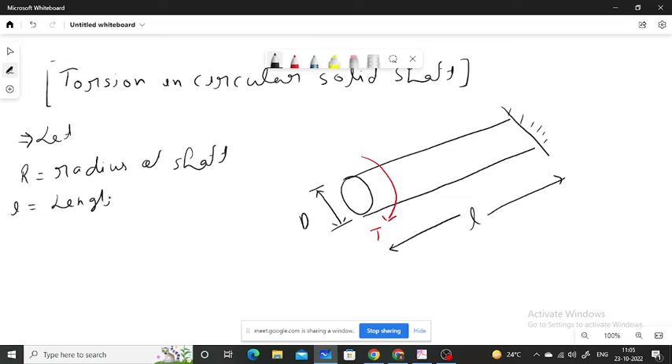Capital R is the radius of the shaft, L is the length of the shaft, capital T is the torque applied, small tau is the shear stress, capital G is the modulus of rigidity.

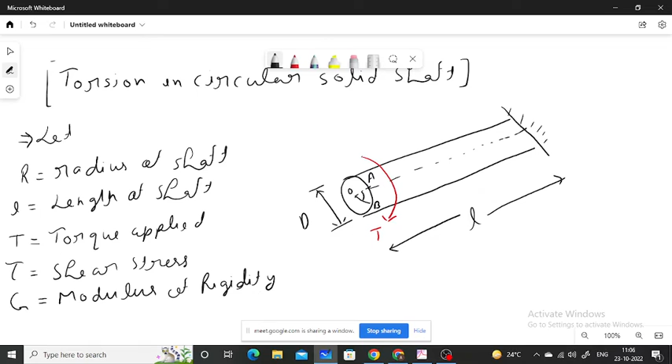Angle AOB is theta. This angle is known as angle of twist. Theta is angle of twist.

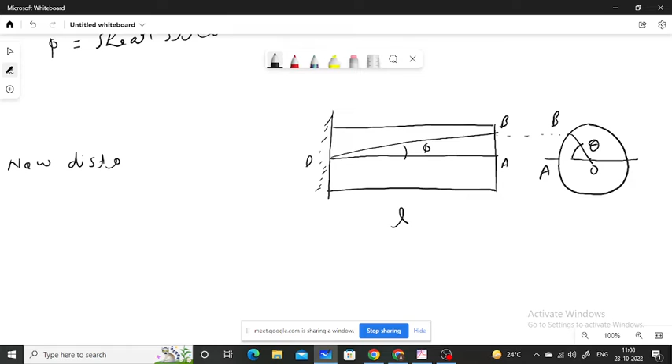Now, distortion at the outer surface due to length, due to torque T.

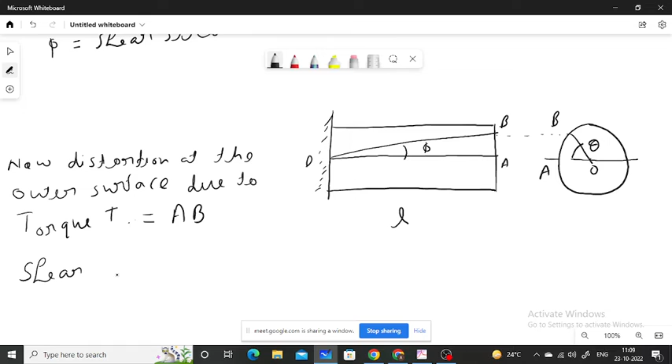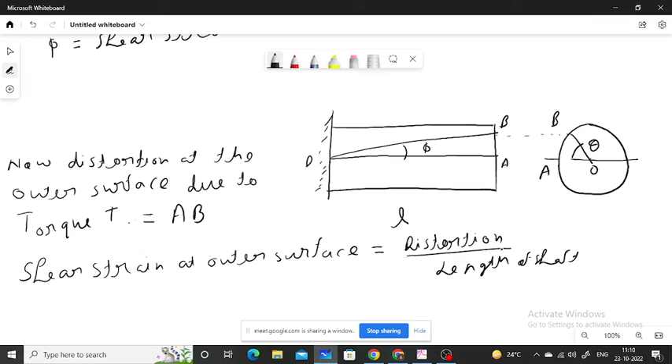Shear strain at the outer surface will be equal to the distortion divided by length of the shaft. As we know that

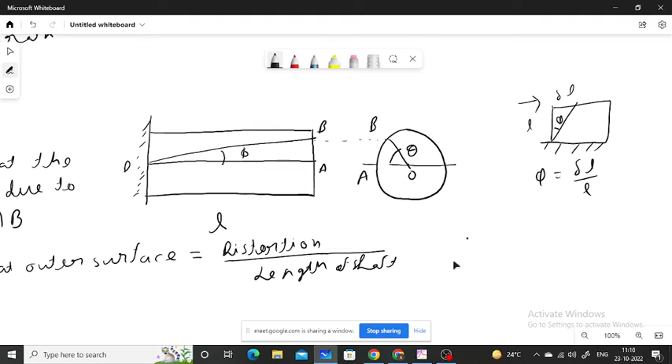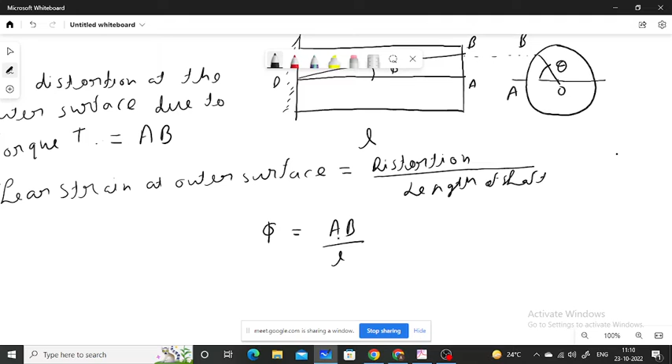in the case of shear strain, if a parallel force is applied and it shifts by delta L, this is the initial length L, then in that case shear strain phi is equal to delta L upon L, distortion upon initial length. So here shear strain phi will be equal to AB upon L.

Now, distortion AB will be equal to the radius of the arc multiplied by angle, r theta. Substituting the value of AB in above equation, phi will be equal to r theta upon L. Okay, r theta upon L.

We know that, according to Hooke's law, shear stress is equal to the modulus of rigidity into strain. So from here, phi will be equal to the shear stress upon modulus of rigidity.

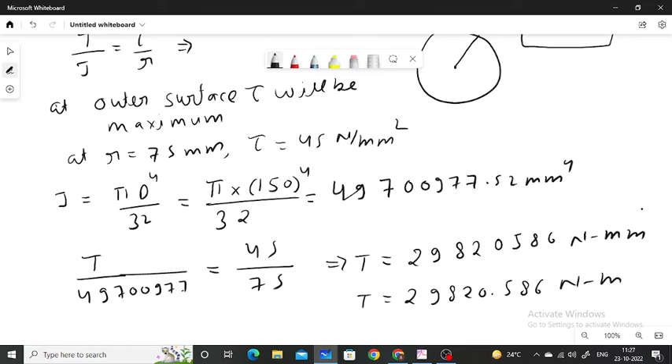Now putting this value in the torsion equation, T/49,700,977 = 45/75, the shear stress is 45 and the radius is 75. So the maximum torque T will be equal to 29,820,586 N·mm, or 29,820.586 N·m. This will be the maximum torque that can be transmitted by the shaft. Okay.

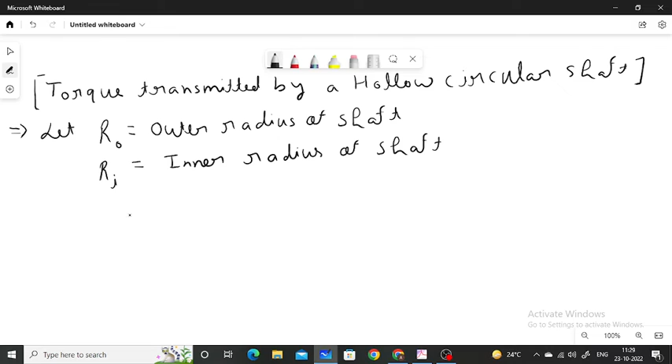Now come to the hollow circular shaft: torque transmitted by a hollow circular shaft. Let Ro be the outer radius of the shaft, Ri the inner radius of the shaft, capital T the torque transmitted by the shaft, and G the modulus of rigidity of the shaft.

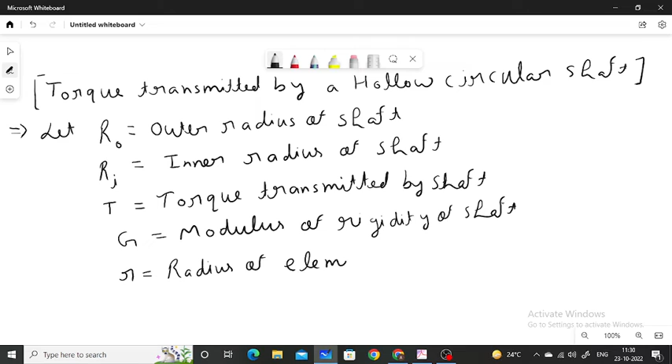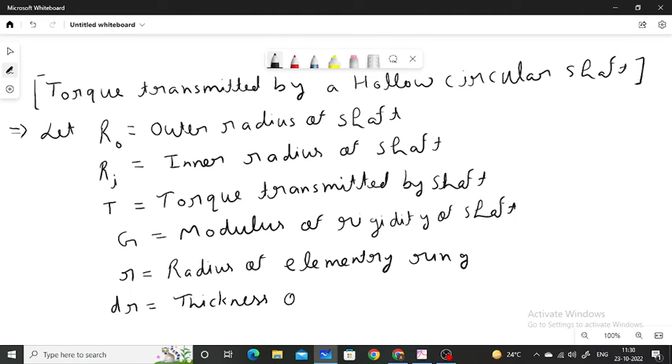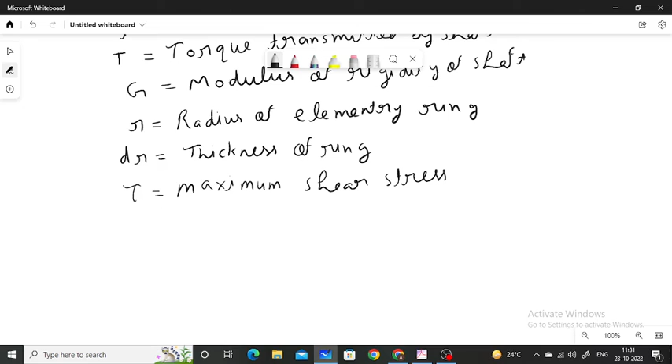Okay. And small r is the radius of the elementary ring, dr is the thickness of the ring, and tau is the maximum shear stress. This maximum shear stress occurs at the outer surface of the shaft. Okay, and tau r is the shear stress induced on the elementary ring. Okay.

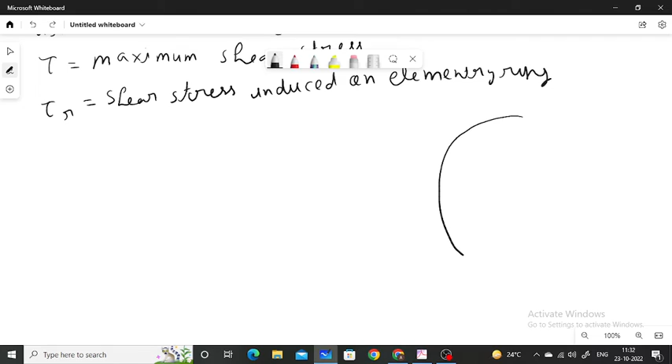The outer radius of the shaft is Ro, the inner radius of the shaft is Ri. Small r is the radius of the elementary ring and dr is the thickness of the elementary ring. Now, shear stress at the elementary ring is obtained from the equation tau/Ro = tau r/r, or shear stress at the ring = (tau/Ro) × r.

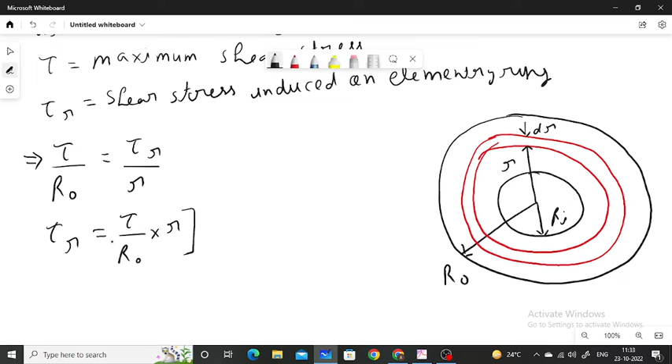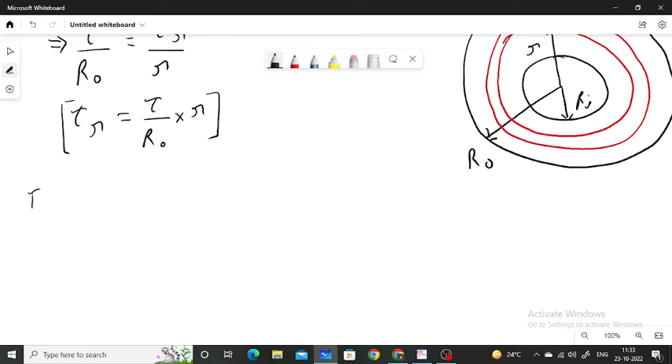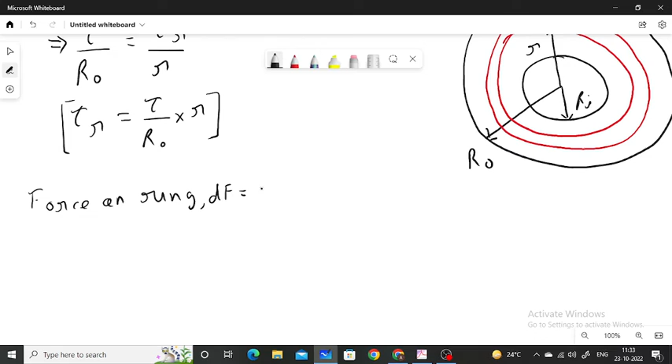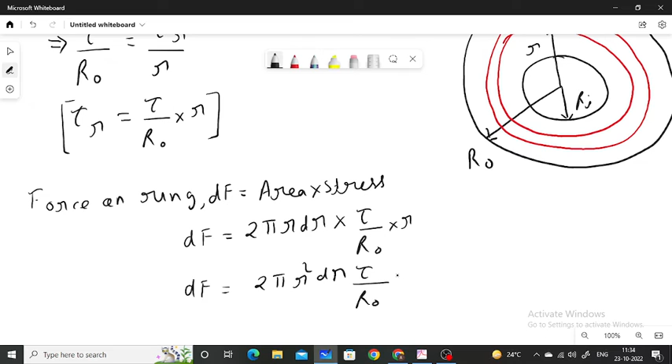Turning force on the ring: force on ring dF = area × stress. Area = 2 pi r dr, and the stress = (tau/Ro) × r. Now dF = 2 pi r² dr tau/Ro. Okay, this is the force on the elementary ring.

Now the turning moment on the ring, dT = force × radius r. So dT = 2 pi r³ dr tau/Ro. Okay, the total turning moment on the shaft will be equal to the integration of dT from Ri to Ro. Okay.

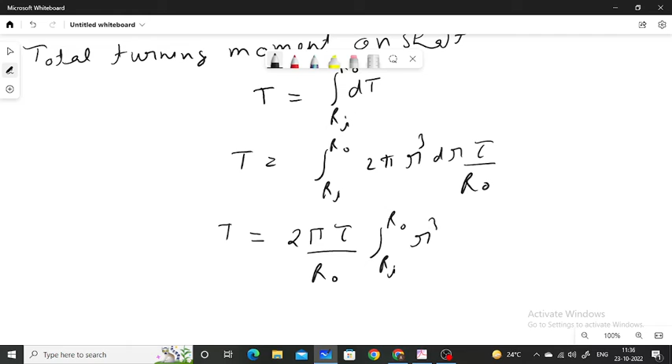Now integrate the above equation: integration from Ri to Ro of 2 pi r³ dr tau/Ro. So from here T = (2 pi tau/Ro) × integration from Ri to Ro of r³ dr. T = (2 pi tau/Ro) [r^4/4] from Ri to Ro, or T = (2 pi tau/Ro) × (Ro^4 − Ri^4)/4.

Let Do be the outer diameter of the shaft, and Di the inner diameter of the shaft.

It is equal to 2 Ro, and this is 2 Ri. Okay, now from here, outer radius will be equal to the outer diameter of the shaft divided by 2. Ri will be equal to the inner diameter of the shaft divided by 2.

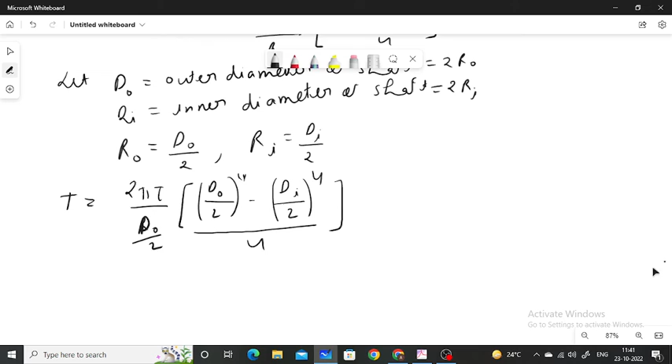Now T will be equal to pi by 2 shear stress tau, within bracket d outer to the power 4 minus d inner to the power 4 upon 16, into 2 upon d outer, the diameter of the outer surface. Okay.

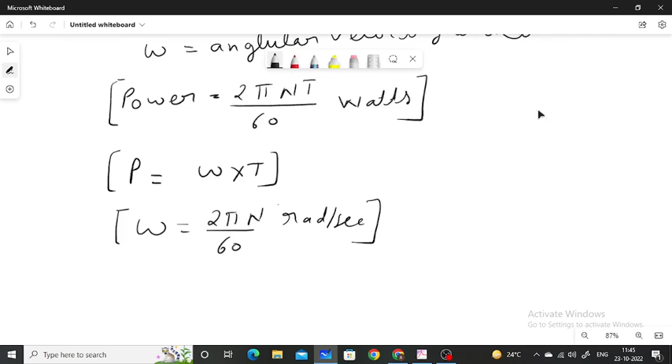So for a solid or hollow circular shaft, the torsion equation will be T by J is equal to tau by R is equal to G theta by L, where T is the maximum torque transmitted by the shaft and J is the polar moment of inertia. For a solid circular shaft, J is pi d to the power 4 by 32, and for a hollow circular shaft it is pi by 32 times outer diameter to the power 4 minus inner diameter to the power 4.

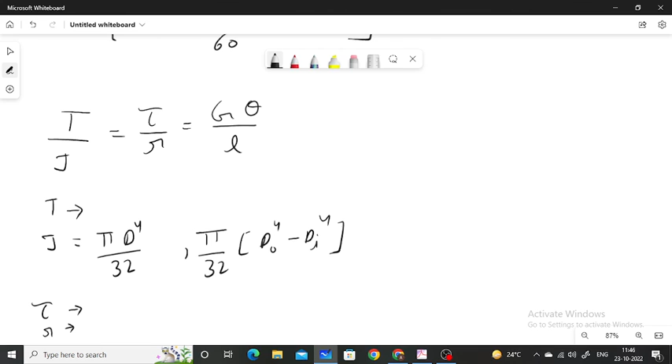Tau is the stress induced at a ring of radius r. Capital G is the modulus of rigidity of the shaft. Theta is the angle of twist and L is the length of the shaft. Okay. By this formula we can calculate the shear stress on different rings due to the torque applied on the shaft. Okay.

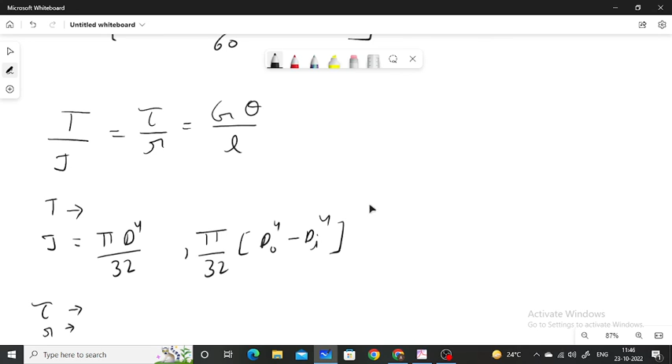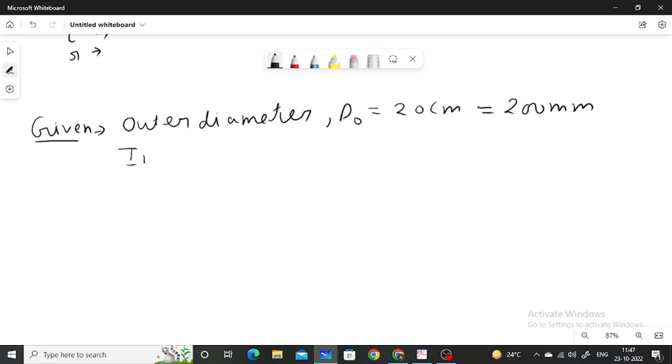Now, a hollow circular shaft has outer and inner diameters of 20 centimeter and 10 centimeter. Outer diameter DO is equal to 20 centimeter or 200 mm. Inner diameter DI is equal to 10 centimeter or 100 mm.

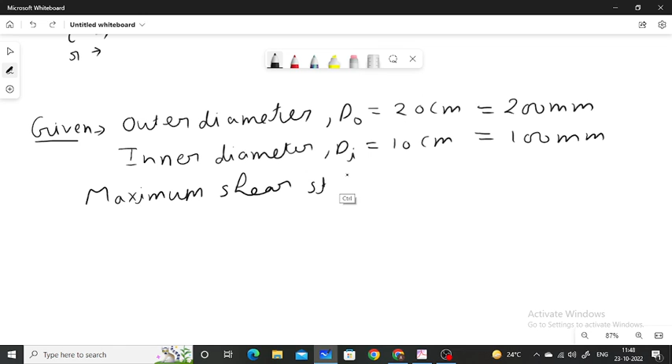In a hollow circular shaft of outer and inner diameter of 20 centimeter and 10 centimeter respectively, the shear stress is not to exceed 40 Newton per mm square. The maximum shear stress given is 40 Newton per mm square. Find the maximum torque which the shaft can safely transmit. Let capital T be the torque transmitted by the shaft. Is it clear?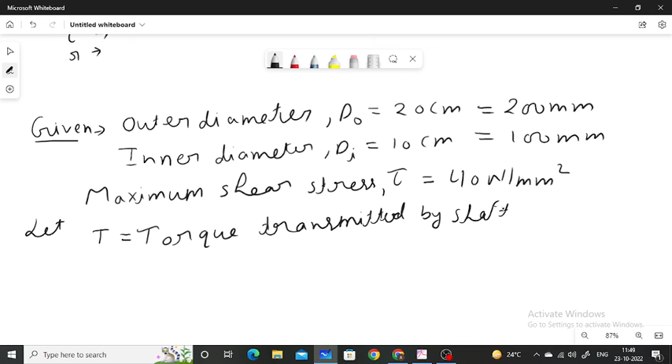Now, the polar moment of inertia of the section J will be equal to pi by 32 times diameter of outer circle to the power 4 minus diameter of inner circle to the power 4. Clear? It will be equal to pi by 32 times 200 to the power 4 minus 100 to the power 4. So this will be the polar moment of inertia.

Calculating the value, J will be equal to 1.472621 into 10 to the power 8 mm to the power 4. Okay.

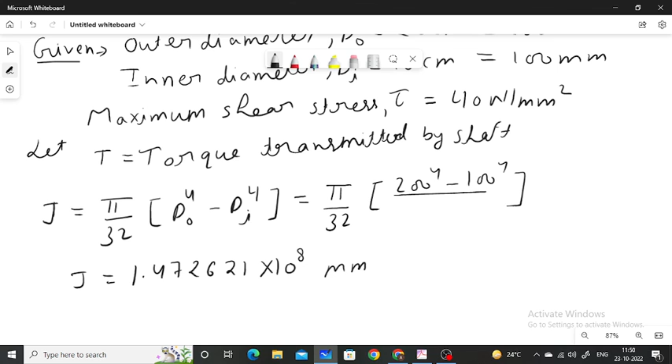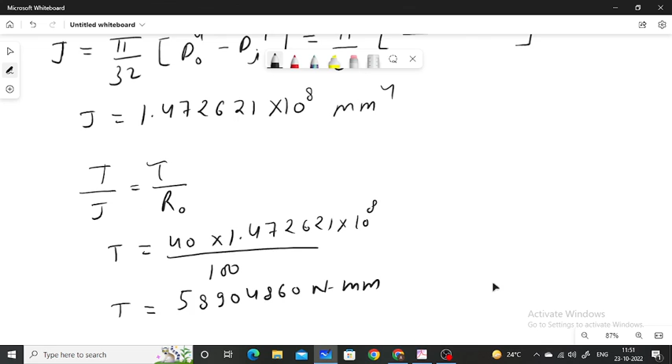So maximum torque capital T will be equal to tau into J by RO. So T is equal to maximum shear stress 40 times J, 1.472621 into 10 to the power 8, divided by outer radius 100 mm. So the maximum torque transmitted will be 58904860 Newton mm, or 58904.86 Newton meter. This will be the maximum torque transmitted by the shaft safely.